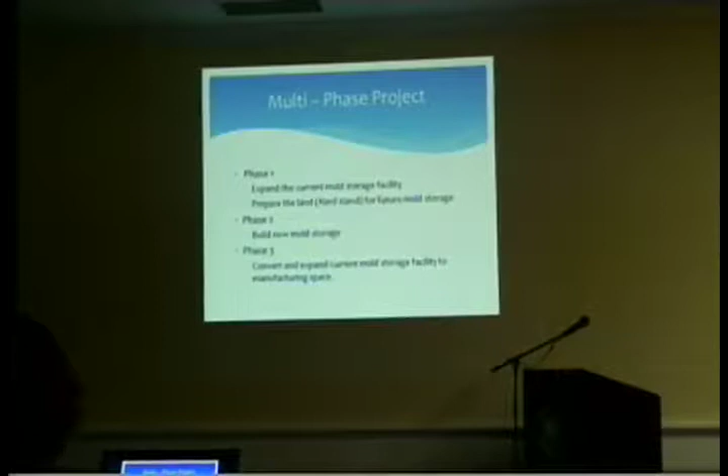It's a multi-phase project, and where the molds are now, where Regulator is now, is actually phase 3. The plan is to convert and expand a current building into manufacturing space.

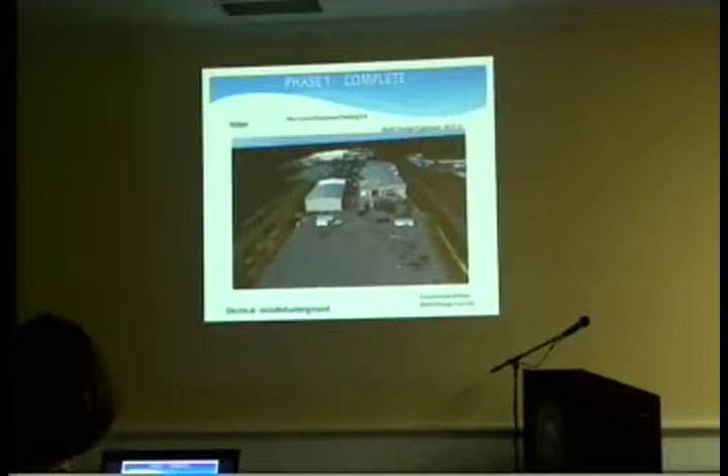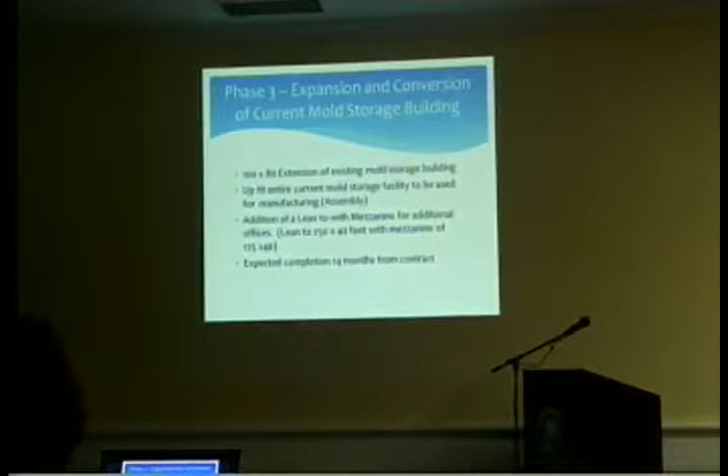This is the building that is proposed to be expanded, and it will include space for manufacturing as well as an upstairs mezzanine for additional offices that will serve primarily the engineering team at Regulator.

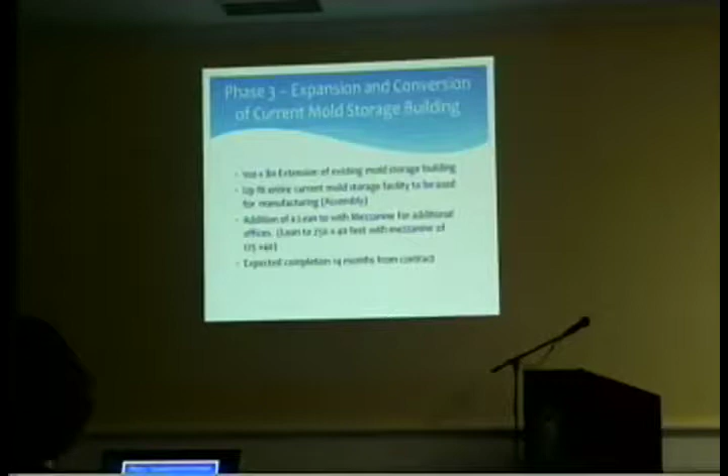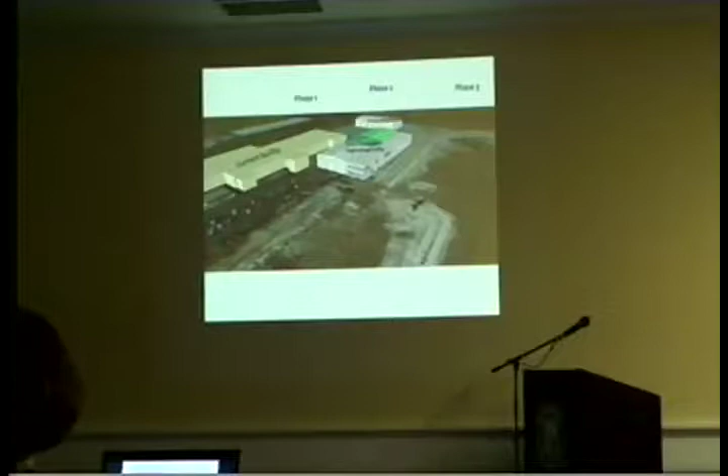And here's a picture of what the expansion will look like when it's completed. So we're really excited about the process, about the project.

Again, for the purposes of the grant application, the company is committing to create 32 jobs, but they plan on hiring more than 32.

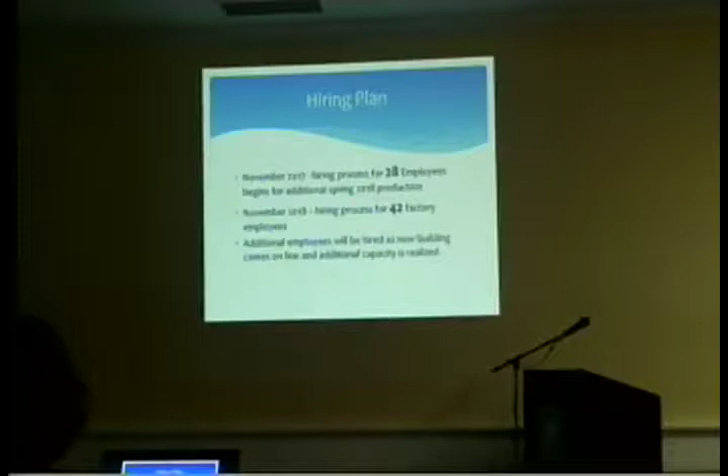The council knows from previous applications that the grant requires a dollar-for-dollar match from the company, which the state has tentatively approved a $320,000 grant for.

But of course, this project is going to cost well in excess of that. The $320,000 grant not only requires a match from the company, but it also requires a 5% cash match from the town. Mallory and I have been talking with the Edenton Chowan Partnership, as well as Kevin Howard, the county manager.

A 5% match on $320,000 is $16,000, and we would like for this project, and in projects going forward, that if the match requirement is in excess of $10,000, we would ask the partnership to contribute to fund the cash match, because that's, while it's a lot of money for everybody, it's a lot of money for the town and the county.

We feel like we can't commit, Mallory, that the partnership will agree to that, but we have confidence that they will. And if there is a problem, we'll certainly come back and let you know, but we believe that is a reasonable request, especially since the county is supportive of it as well.

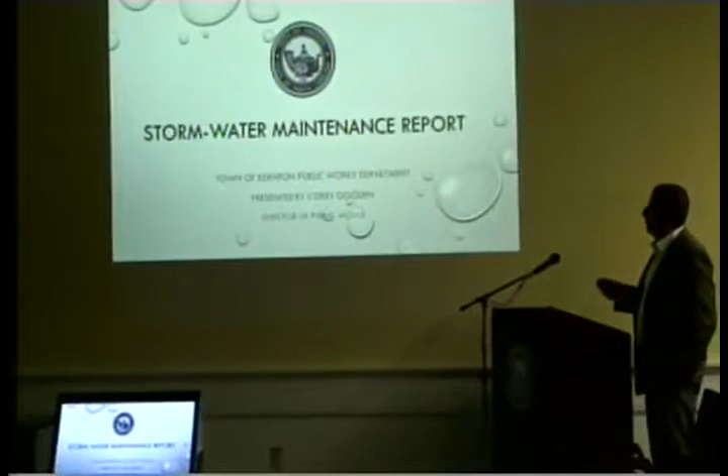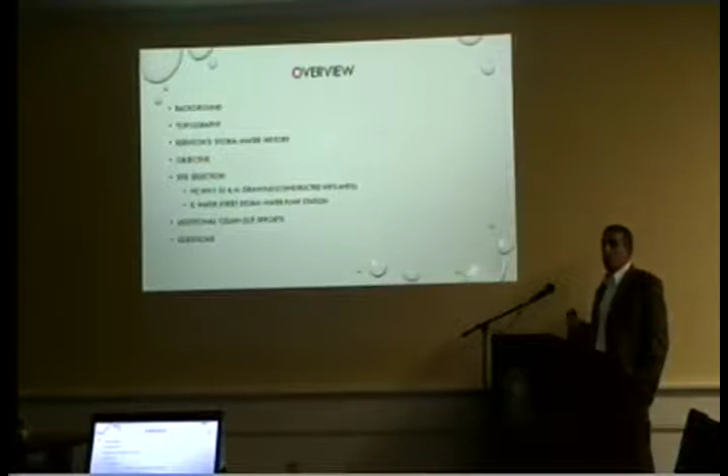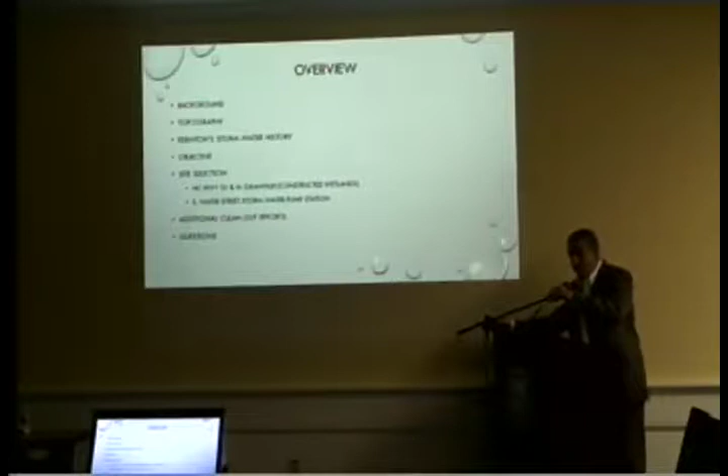Well, I hope to keep things positive like the first half of the meeting, but I do want to thank y'all for giving me a chance to speak tonight. The first half, we're going to look at a stormwater maintenance report. We'll start off with some background material, just kind of general statements around stormwater, so we get an understanding of terminology as we're going through the presentation.

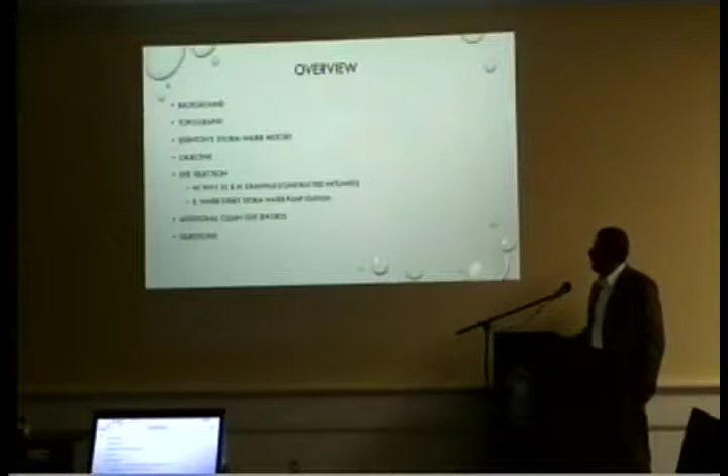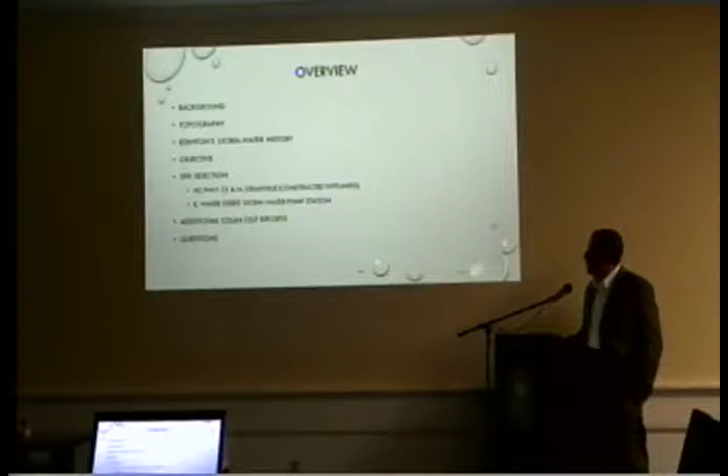After that, we'll look at the local topography, Edenton stormwater history, and our objective over the past two months and what the public works plans were moving forward. We'll talk about site selection, particularly NC Highway 32 and North Granville in and around the constructed wetlands. Then we'll do an executive recap around the East Water Street Stormwater Pump Station, which we met with the Wooten Company about last Monday for public forum. We'll recap that, look at the additional clean-out efforts we've been doing daily, and then handle any questions anyone may have.

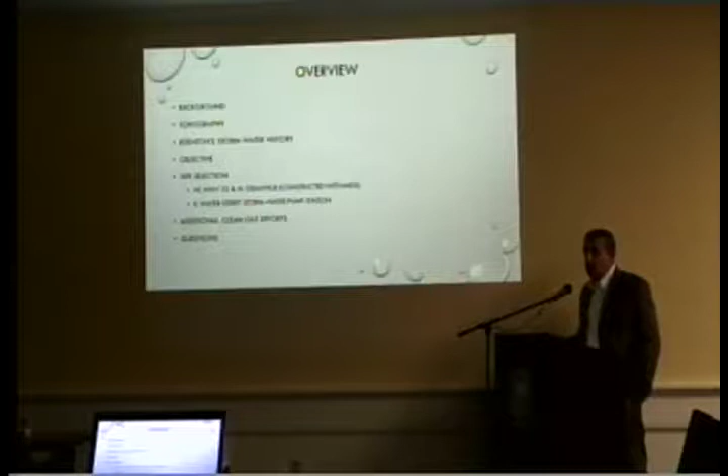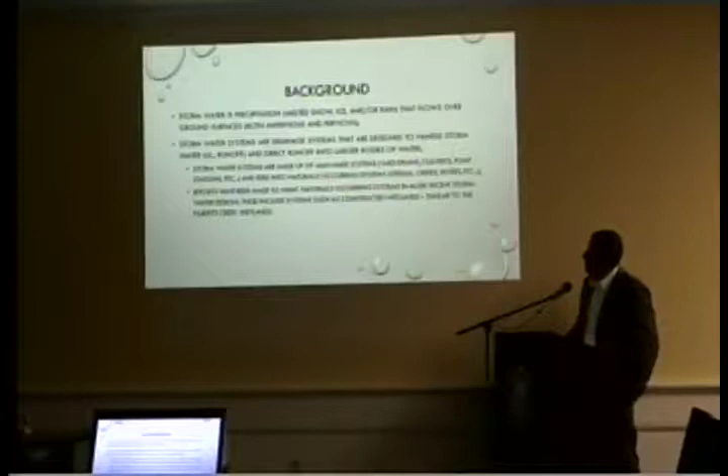So as far as background goes, stormwater is any precipitation, whether snow, ice, or rain, that flows over ground surfaces. This can be anything that's impervious or pervious. Stormwater systems are drainage systems designed to handle stormwater runoff, directing it into larger bodies of water. Stormwater systems are made up of man-made systems including yard drains, culverts, pump stations, etc., which feed into naturally occurring systems such as streams, creeks, rivers, etc.

Efforts have been made to mimic naturally occurring stormwater systems, such as what we have here at the Filberts Creek wetland.

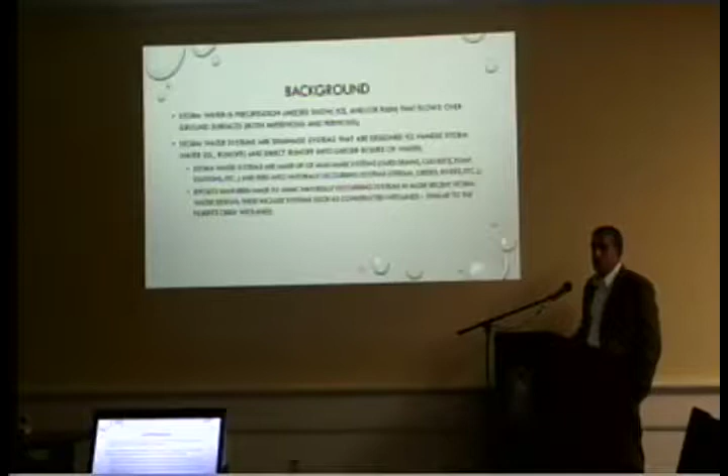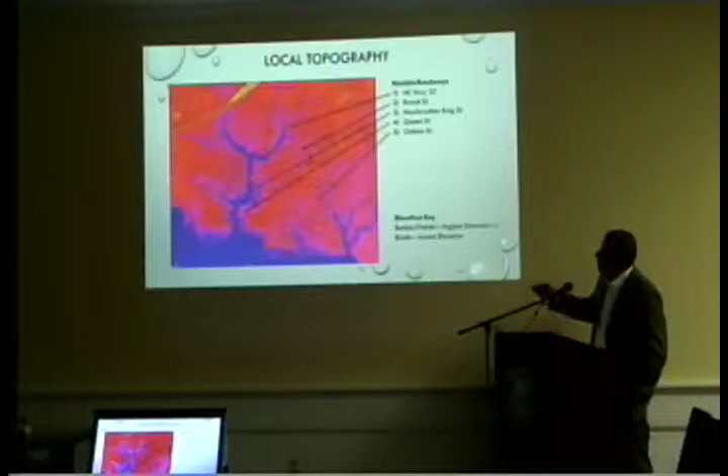So if we look at the local topography, the reddish/pinkish areas show the highest elevation within the town, and the bluish areas show the lowest elevation. We've also noted some roadways to get a perspective of where we're at within town: MLK, Queen Street, North Oakum, NC 32, and Broad Street. As you can see, this is fairly consistent with our waterways—there is some spillover in some areas, but for the most part this is something we're all fairly familiar with.

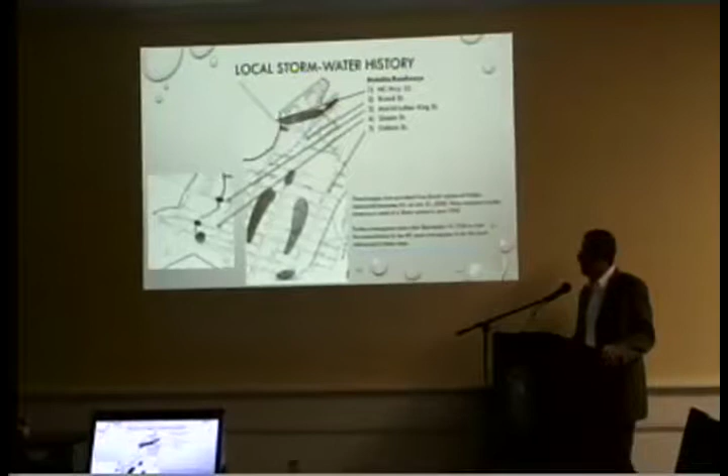So if you look back at the local stormwater history, we're trying to put this in perspective where you can see the notable roads: NC 32, where Filberts Creek runs parallel to Granville, Moore Circle, Broad Street, Oakum Street, and Queen Street. Looking back, we found these images from an engineering report from David Jackson of Hobbs Upchurch Associates from July 2000, representing trouble areas the town had found previously in the early 60s. This was a result of a storm system that moved through in late summer 1960—further research showed this was actually a hurricane that came through on September 12th, 1960.

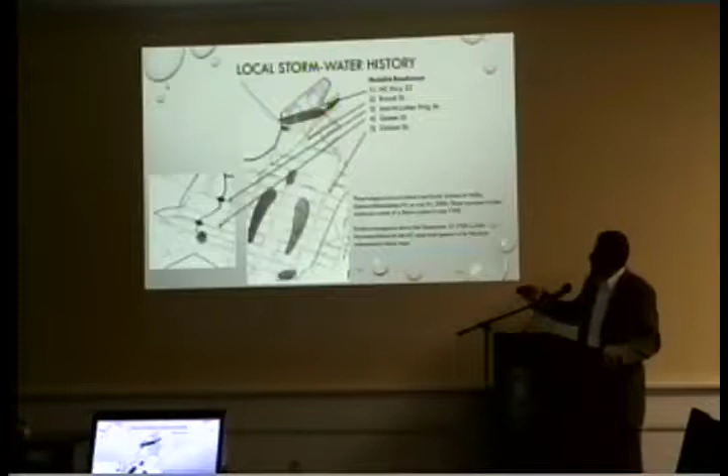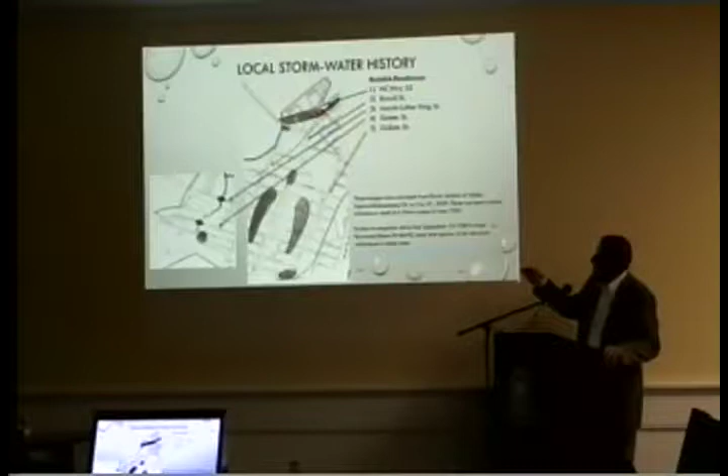This is a result of flooding that we had in the area. As you can see along Broad, we have two areas of interest along Water Street, also around Filberts Creek where the constructed wetlands is.

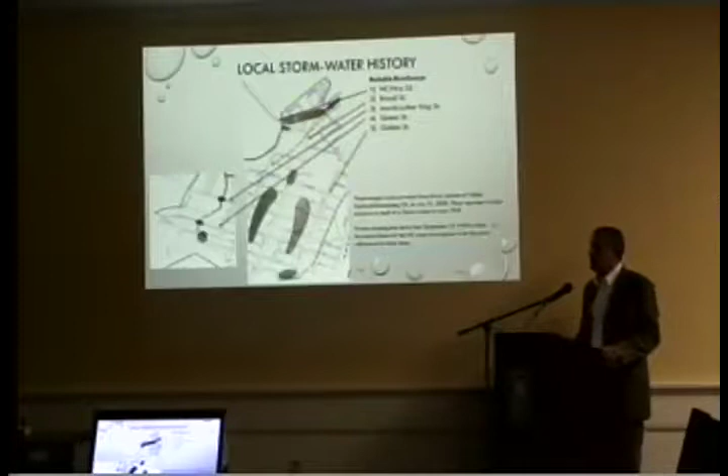Can I just interrupt one second? Yes, it made me think, looking at that and remembering Hurricane Matthew. Fire Chief, doesn't it look like those are the areas where you made your rescues? Yes, ma'am.

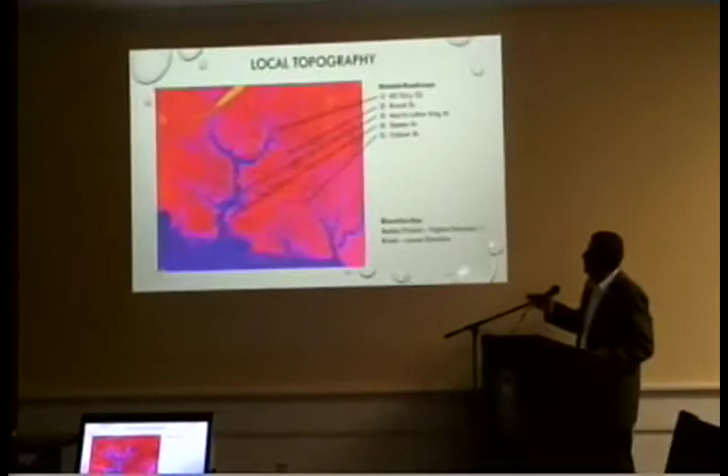And so if you look back, this is consistent also with the topography of the town itself. This is something that appears to have been an ongoing issue over the years, and we were able to validate that from maps we located from the early 60s.

Our objective for the Public Works Department, particularly our Streets Department, was to improve the current system containment capacity and improve the capability of our stormwater system to process runoff safely and efficiently. That's really been our goal moving forward.

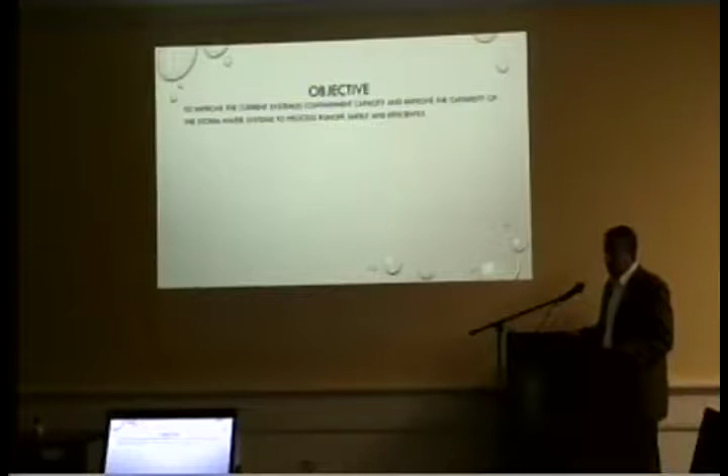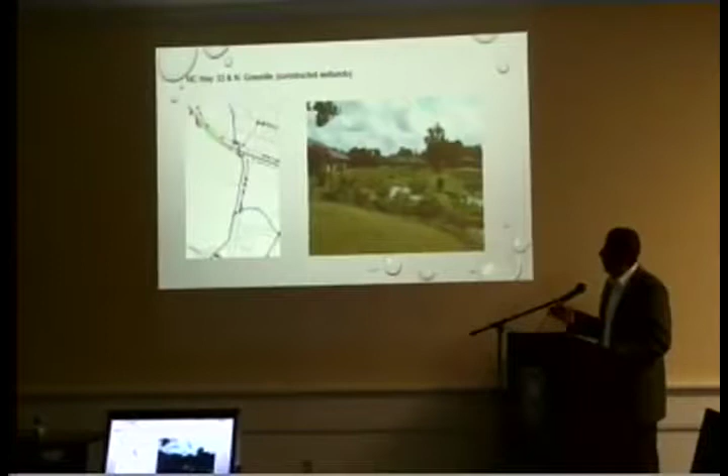So the first site we're going to discuss is around Filberts Creek and the constructed wetlands. Here again is NC 32, and this is Granville. As you can see, the existing stormwater systems on the south side of NC 32 and also on the north side as it approaches Moore Circle. We knew there was a very high level of water in this area, and we wanted to see if there was anything we could do to get water to move through this system a little quicker.

One of the things we began with was on the north side of NC 32. There was an irrigation ditch and also a culvert that fed into a stormwater basin on the north side, running up behind the Shell station or duck-through area. This area was pretty heavy with soil and sediment within the water system. We were able to get both of these areas cleaned out to try to get water moving south of 32 and in parallel with Granville, so we could push things through when we get parallel here to Granville Street.

Also, one of the issues we ran into: there was a clean out station at the intersection of 32 and Granville that we really couldn't access to monitor our stormwater system, to keep an eye on things and make sure we didn't have a lot of buildup, trash, or debris in the system that could be restricting access. The street supervisor was able to get this area cleaned up, and we now have this graded correctly. So we're able to take a look at this, which we do more often now because it's a lot more accessible.

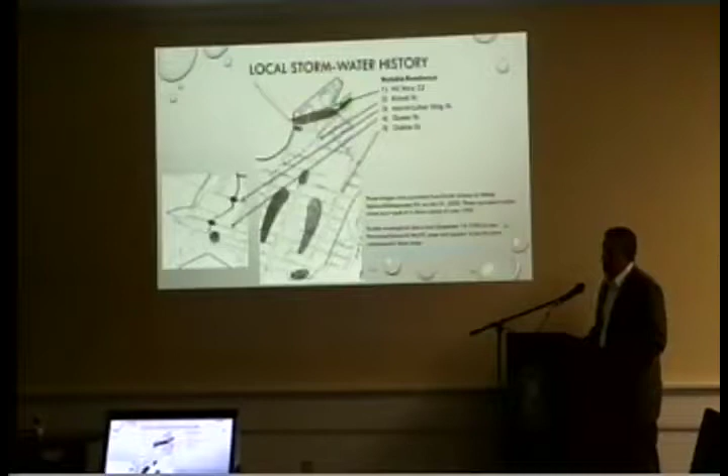Also, while we located this, there was one additional storm drain and one culvert that we found that had been completely covered. There was no stormwater moving south on the east side of Granville through this area. So now, if we look back, you can see there's also been flooding concerns around the intersection of Granville and 32. We feel like these two items should help mitigate that water and get it through the wetland system. This is a really good find, an outstanding job from the supervisor and his crew to locate this and get this area cleaned up.

Also, there was some overgrowth in this area that we cleared to allow the sidewalk to be clear, so now when you're walking through here, you can see that on Saturdays at the farmer's market when you're headed back to your vehicle. But the major area of concern was parallel to Granville across from the county offices.

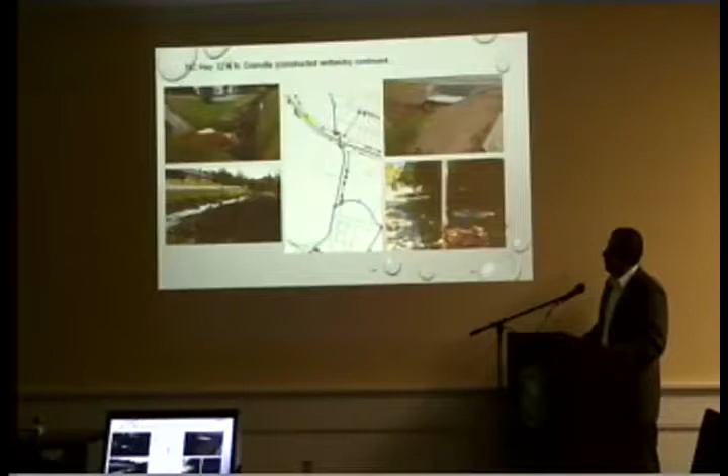There was a large amount of sediment that had gotten into this ditch. We were able to get this cleaned and graded. And if we look going forward, we've actually seen substantial drops in front of the medical center in between both of their driveways. And then also on the county side, we've seen a great amount of water move through this system.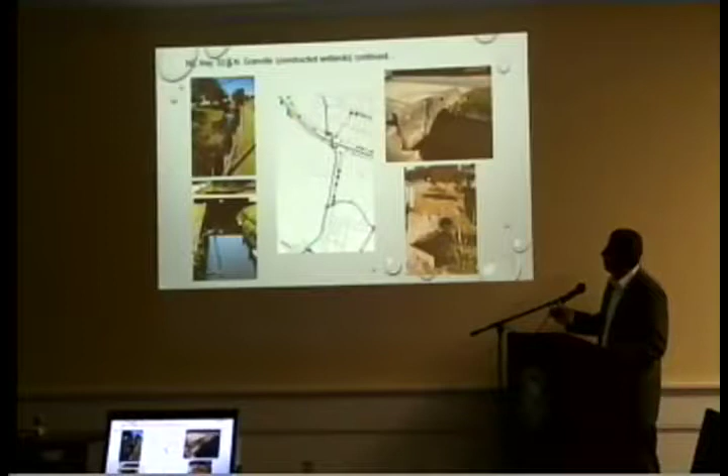So if you look at these photos we have here, we lost over a foot of water just in those ditches in front of the medical center and parallel to Granville. This is roughly just in the ditches, not counting what's moved through the wetlands. Roughly 50,000 gallons of water has since moved through and into Filberts Creek.

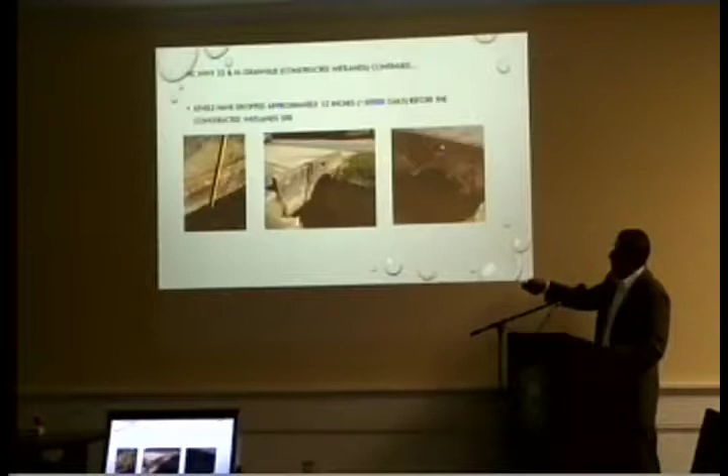You can see the before, how restricted the driveway culvert was, versus now we have a substantial drop in the water line from here to the current water level. We've really seen a lot of great success out of this and are very pleased with what the guys were able to find. Outstanding job.

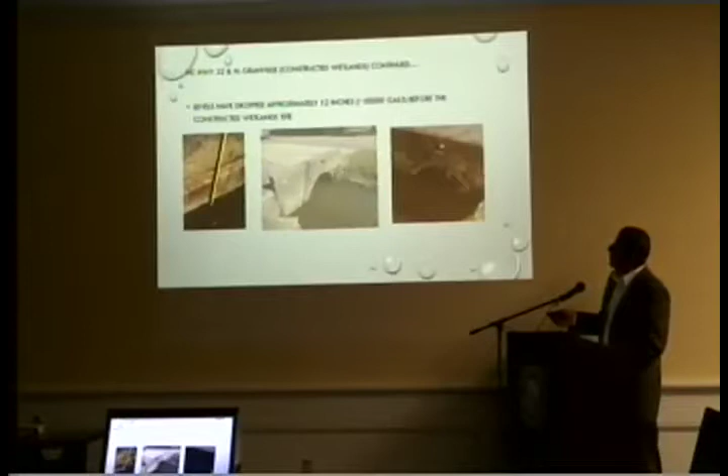So the next site we're going to discuss tonight is the East Water Street Stormwater Pump Station. As I mentioned earlier, the Wooten Company was in on the 16th of October, so we're going to look at an executive summary of what they had during that discussion.

The East Water Street Stormwater Pump Station was designed in 1981 by the Department of Agriculture Soil Conservation Service. This pump station handles roughly 74 acres of the downtown Edenton area and discharges directly into Queen Anne Creek. The pump has a capacity of 15,000 gallons per minute, and the well itself is just under that. There are two primary influent pipes that feed into the pump station, a 36 and 48-inch pipe, and then two gravity-fed connections that exit the pump station. There's also a force main for when the pump comes on, which pumps out into Queen Anne Creek as well.

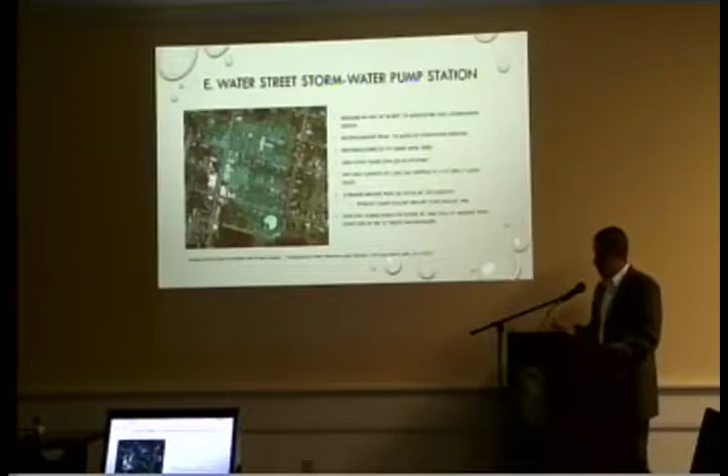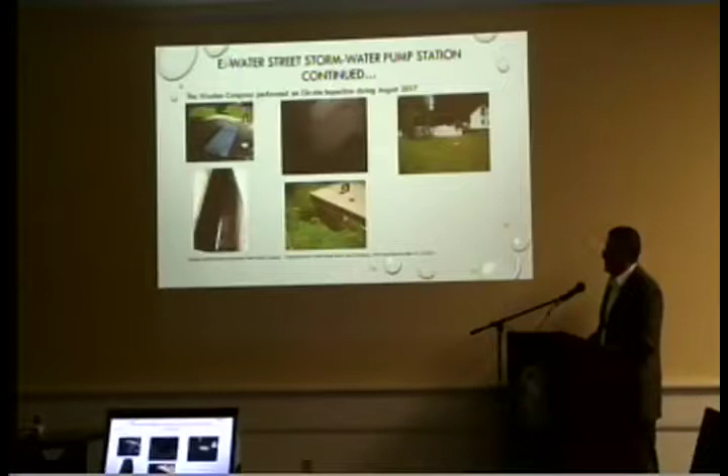One of the things the Wooten Company performed was an on-site inspection in August of 2017. The inspection was to try to troubleshoot and see what items we could handle in-house, what long-term projects we may have in the future, and any short-term items we could handle.

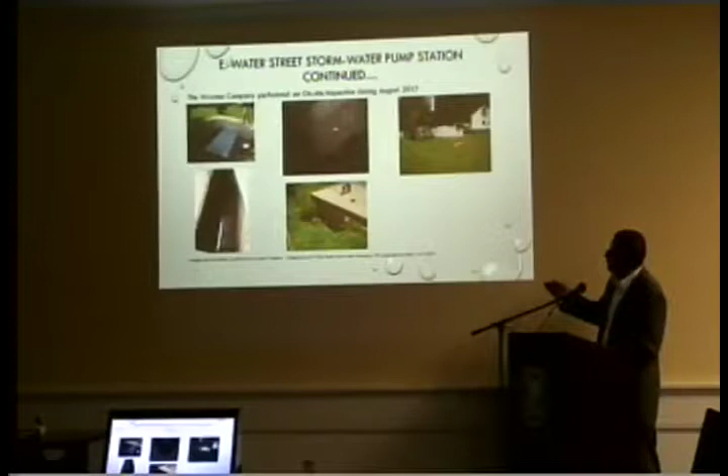If you look, we have the access point for the flap valve itself. We had some washout areas around the pump station foundation, an in-feed culvert, and also the two influent pipes that feed the pump station, running from Queen south into the East Water pump station itself.

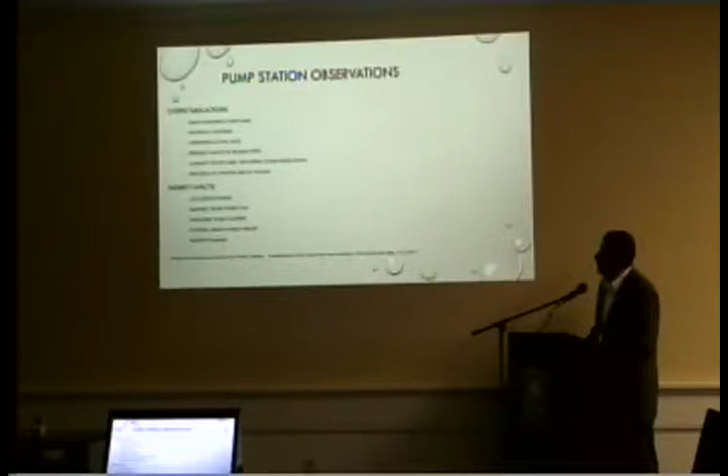Some of the things Wooten found: there's a leak in the discharge at the force main, some electrical concerns, and issues with the general operation of the flap valve. There was also concern about the capacity around the influent lines, as well as things we could do during storm surge events, where we could completely shut off the pump station to eliminate the recycling of water from the bay back in and creating more problems.

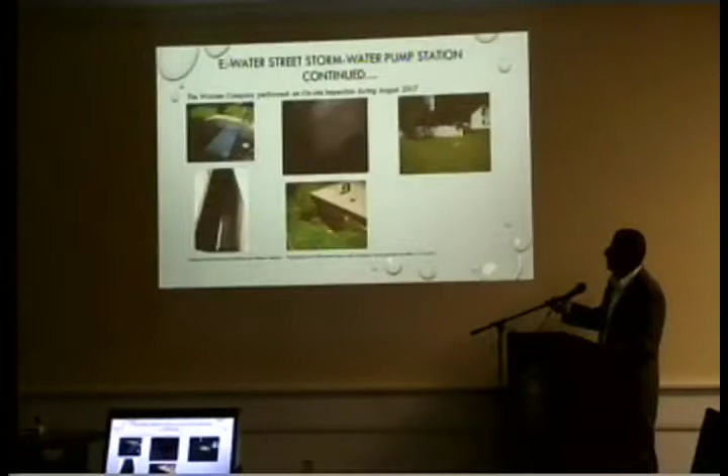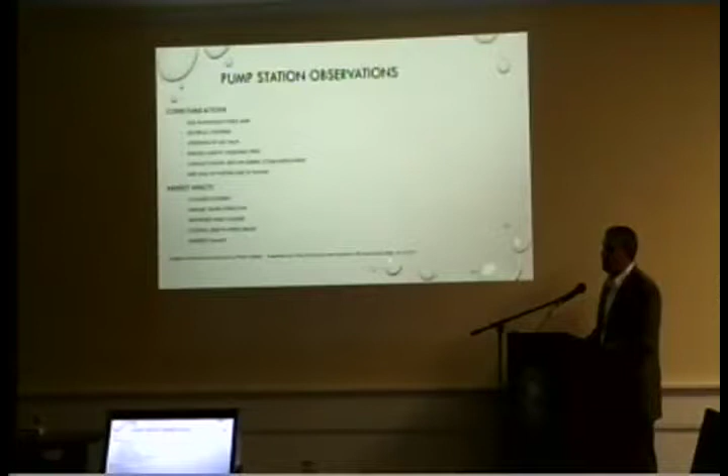Also, like we were just looking at, there's a couple of sinkholes where we had a leak. As you can see, these have some indirect impacts: local flooding, sanitary sewer overflows, temporary road closures, and risk to public health and potentially property damage.

What the Wooten Company recommended short term was adjustment of the float levels in the wet well, as well as addressing the sinkhole in the western portion of the station. We were going to clean and CCTV the two influent lines, repair the force main leak, replace or rehabilitate the flap valve, and replace the drop inlet located upstream.

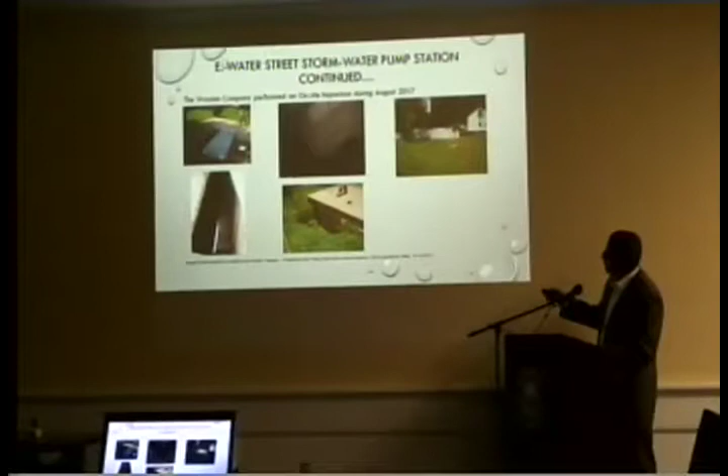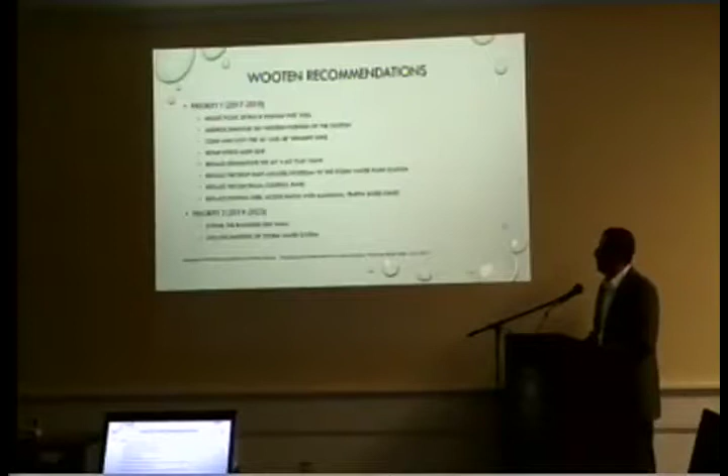That was this area here. Also, we were looking at replacing the electrical control panels, as well as replacing the existing steel access hatch with something more of a traffic-rated grating, so we're able to view that flapper valve and check its operations during our normal PMs. That was our short-term list, within the next 2 years.

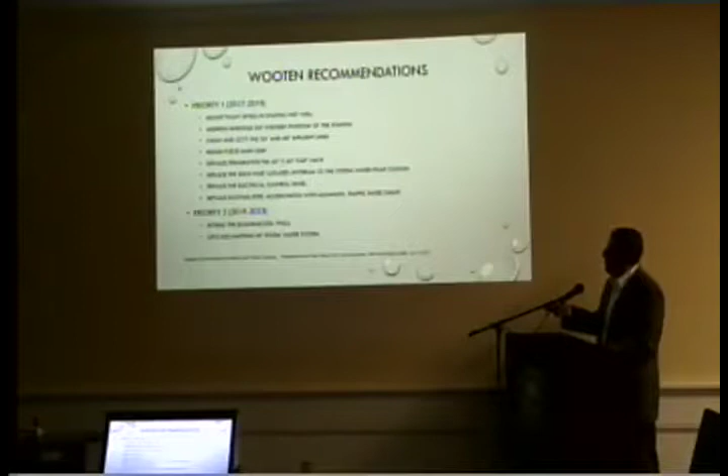When we look at our priority 2, or long-term goals, they are extending the bulkhead there in the curb around East Water Street, and then finalizing the GIS mapping of the storm system. We currently do have some of the storm system mapped out—Wooten did that work for us as well—but this would be more of a complete GIS mapping of the entire system.

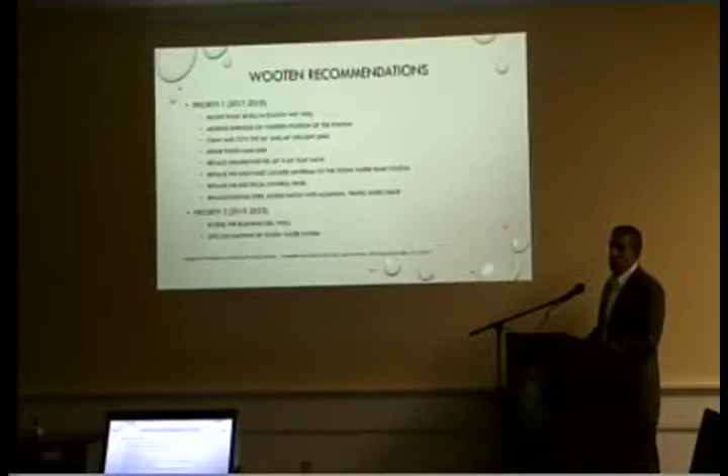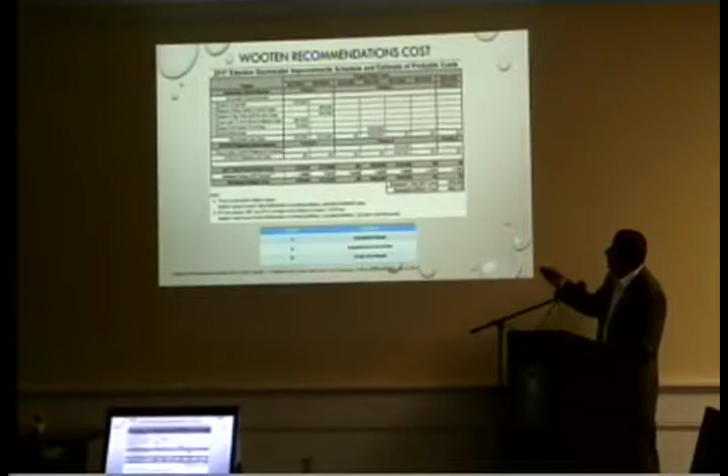Along with their recommendations, the Wooten Company also provided us with costs for each priority 1 and priority 2 item. This gives an idea over the short and long-term goals of what the estimated cost would be for the entire project. But one thing we do want to note is we thought this estimate was high for the electrical—the replacement of the control panel for the pump station, 60,000. We do feel like that's a little high, but also note these are estimates, so these prices are subject to change.

So if we look at what type of improvements we have done in-house over the past year, since Matthew, we have installed a new check valve on the force main to prevent any backflow from Edenton Bay back into the station.

One of the things we are planning to do during the winter months is make the repairs around the force main that Wooten was referencing. This is a short-term fix with the check valve, because it limits the concern of sinkholes to only when that pump discharges.

So any other time, we're in a good spot. We are working with a local electrician to repair the electrical concerns. We felt those estimates were a little high, so we are exploring alternatives with him.

Based on Wooten's suggestion, we adjusted the float levels inside the wet well. The floats were actually at the original design height, but after further analysis with the Wooten company, they felt we could gain a little more capacity out of that wet well by making some adjustments. We've done that within the past 6 to 8 months. That's been taken care of.

We are working now with the local contractor to find divers to check the flap valve and the discharge lines into Edenton Bay. We're still in the process of working through that. Depending on the severity of the influent or discharge lines, that will determine which contractor and which diver we need, as far as their level of certifications.

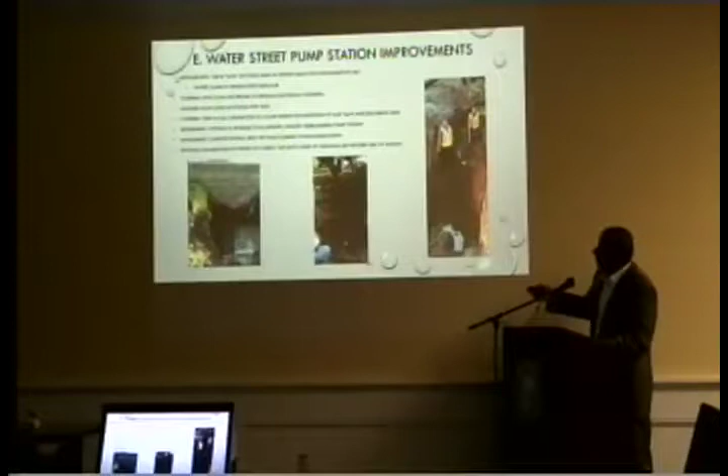We're also exploring options in-house to increase the local runoff capacity surrounding the pump station. That's really to help with local flooding right within that lot. We feel there are some things we can do to add additional capacity to get moderate storms on into that pump station and off the soil level.

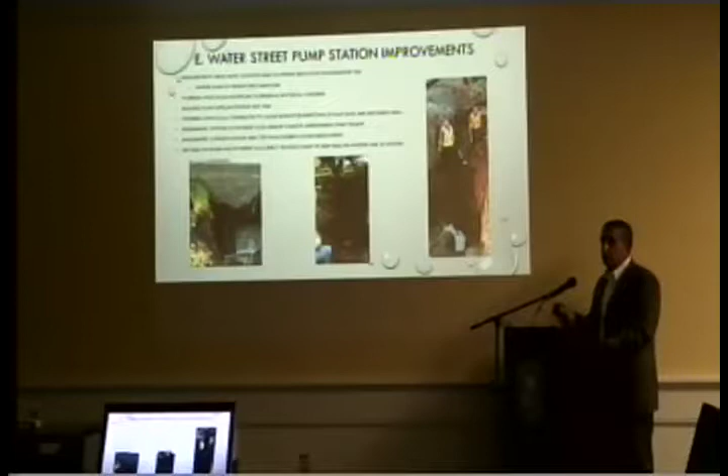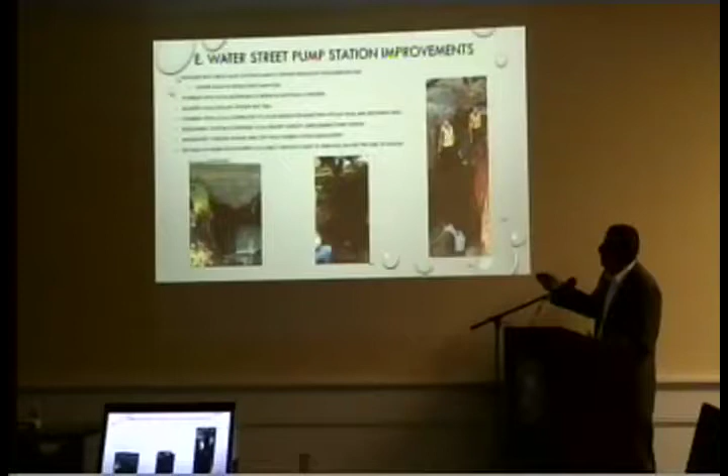What we've also done is implemented complete shutoff during storm surge events, and we've replaced the inflow piping from the street, which is here behind Lincoln and David, that ties into the wet well. That was one of the concerns around the west side of the station where we were seeing the sinkholes.

In addition to these two sites that we've really focused on, there's a lot of additional stormwater clean-out efforts we've been making throughout the week, within that extra hour or two here and there throughout the day once normal operations have finished up.

As of June 25th, 2017, these are the most recent efforts: North and South Broad, North and South Granville, East and West Peterson, East and West Carteret, East and West Freemason, East Church Street, East and West Albemarle, East Eden, Oak Hill Drive Drainage Ditch, East and West Queen.

We did examine section 12 of East Queen and then around the 300 block. What we determined is that we would like to add an additional storm clean-out station for in-house maintenance. The span there was just too long for the equipment we have, and it makes sense for us, dealing with these day in and day out, to be able to do the maintenance ourselves.

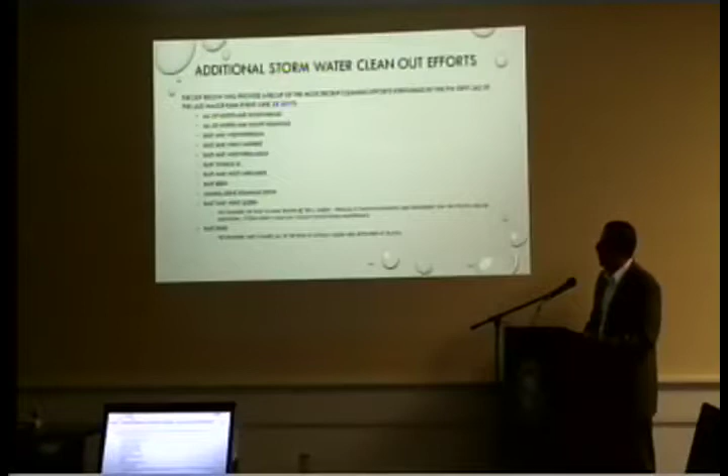So what we think we can do is reduce the length between the catch basin at the street and the first clean-out, so we can make sure there are no obstructions there. And then also feeding into the East Water Street pump station, we've checked East King and examined all of section 01, from East Queen and both Eden Street tie-ins.

Needless to say, we've been fairly busy for the past 6 months, and at this time, if anyone has any questions about anything, I'll be glad to answer.

I don't really have a question, but I'd like to say I've spoken to quite a few residents along the East Water Street area who attended the Wooten presentation, and they were very impressed, very pleased, great relief to see this going on. You've done a fantastic job, in my mind, of going back and looking at those sections that could be improved over time through adequate maintenance and care, preparing for the potential.

And I know, along with a lot of our residents in these particular areas that are affected so quickly by heavy rain, water accumulation, like the backup along Granville Street, the water that came up off of Pembroke.